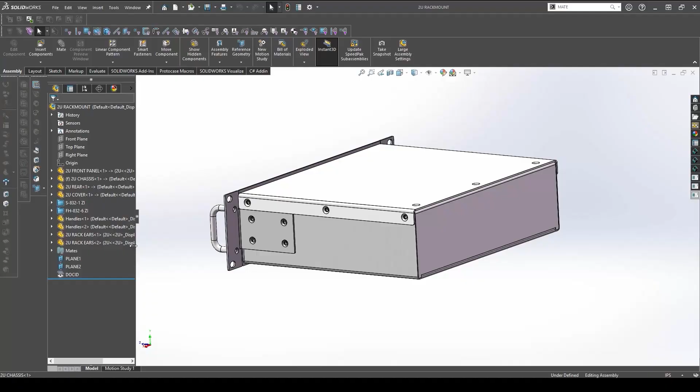First, let's talk about the importance of rack mount designs and more specifically 19-inch rack mount enclosures. Before jumping into your next design, it really does help to understand why the 19-inch rack mount is a go-to choice across lots of different industries. Governed by the EIA 310 standard, this enclosure format is widely used in IT, telecommunications, audiovisual, and scientific labs.

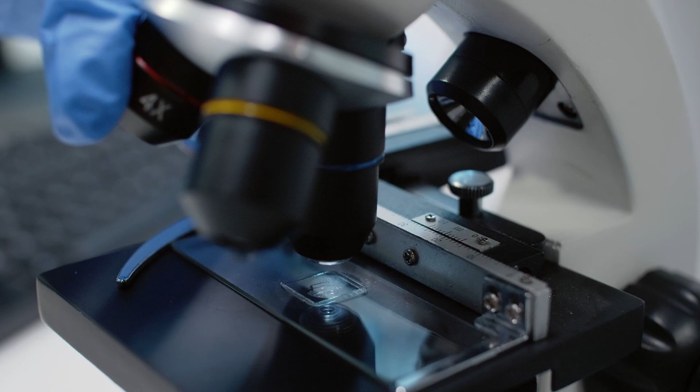It provides a universal system for mounting electrical equipment in a secure, organized way and is most likely installed in storage racks. So here are several facts to know about 19-inch rack mounts if you didn't already know. The standard width: the front panel always has a nominal width of 19 inches, 482.6 millimeters. Unit heights: height is measured in U units. 1U equals 1.75 inches or 44.45 millimeters.

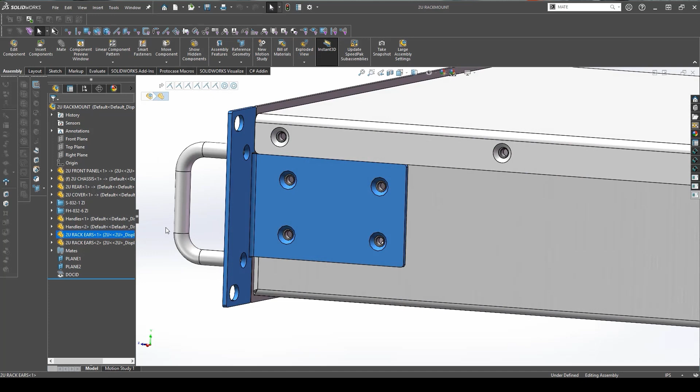Interchangeable mounting: standardized mounting holes enable compatibility across different equipment and racks. These features simplify integration and assembly and make 19-inch rack mounts the ideal choice for housing electronics in professional environments. Designing a functional 19-inch rack mount involves several steps. By defining your requirements early on and keeping key manufacturability principles in mind, you can design an enclosure that looks great, functions well, and is going to be reliable for protecting sensitive components and the electronics inside. So let's look at these steps in detail.

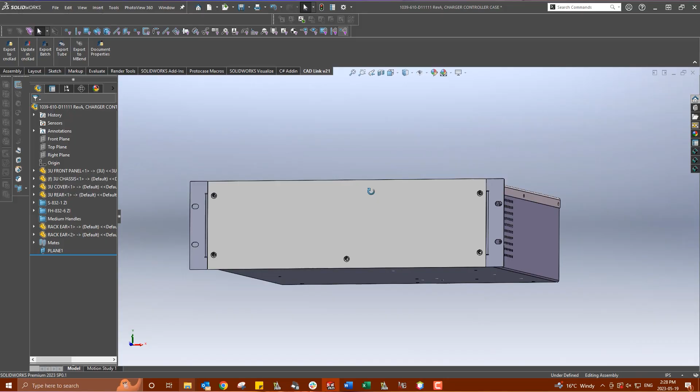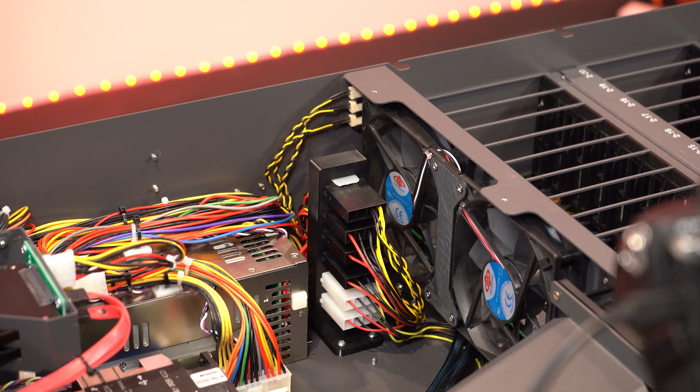Number 1, define your core requirements. Now, before putting pen or pencil to paper, start by asking yourself about the key requirements of your design. What height in U units do I need? Smaller electrical components may fit in 1U or 2U spaces, while systems with more features or faster throughput may need 3U heights or larger. How deep should it be? Depth depends on your largest internal component and the space needed for airflow and cable management.

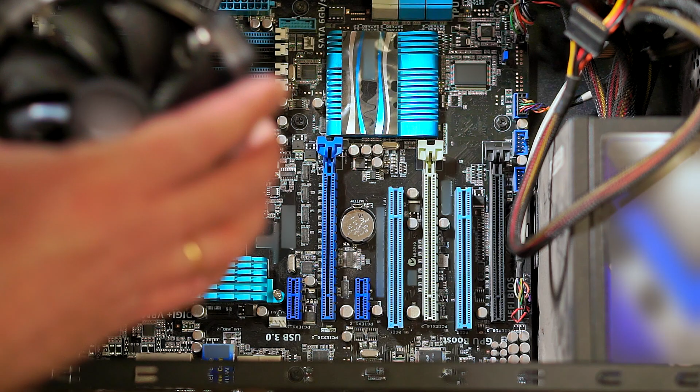Next, what's the internal layout? Roughly map out where components such as PCBs, fans, or brackets will go. This phase will define your internal geometry, mounting points, and cutouts. So for systems generating heat, ventilation or fan cutouts will be essential. Enclosures often include airflow patterns, bringing cool air in from the front or sides and exhausting it out from the back or the top.

What material is best? Lightweight aluminum, like 5052, is a popular choice due to its balance of strength, corrosion resistance, and weight. Steel is much better suited for heavy-duty enclosures or rack mounts that will exist in harsher environments.

Number 2, plan the front panel. The front panel acts as the face of your enclosure. It's where users are going to interact with the device, so you're going to want to think carefully about functionality and aesthetics, especially for the enclosure's intended use case. Controls and indicators: where will buttons, LEDs, or displays go? Are they even critical to the project?

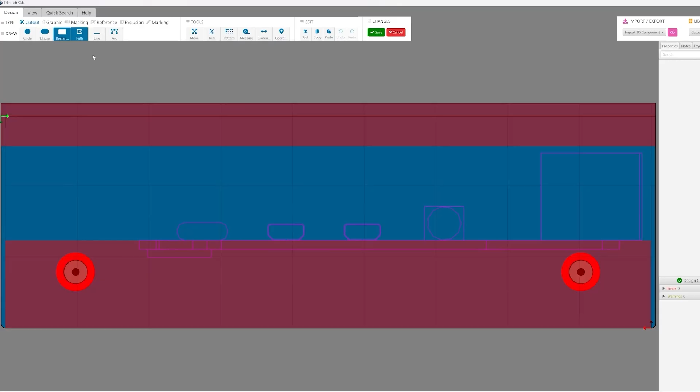Connectors: if USB ports or audio jacks need front access, plan their placement accordingly. Branding: space for digital printing, silkscreened, or laser-cut engraved logos can really elevate your design's professional appearance. Handles.

For larger enclosures, consider adding handles to make rack installation or removal easier. Number 3, design the rear panel. The rear panel is typically going to be the powerhouse for connectivity and cooling components.

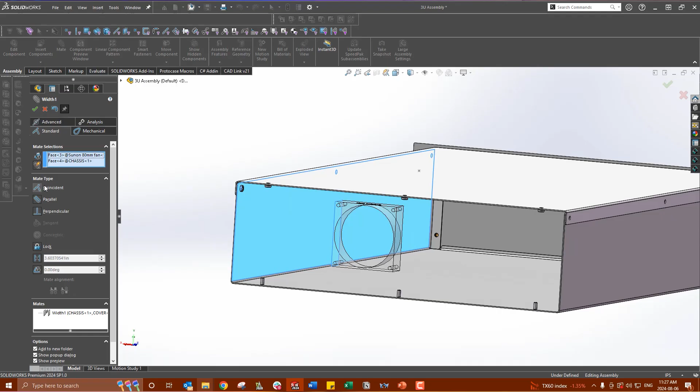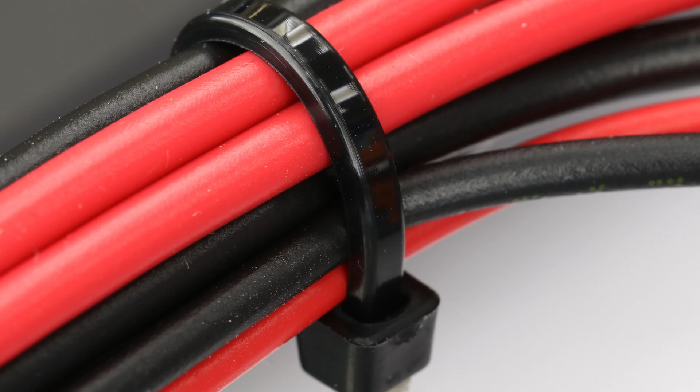Primary I/O. Include connections for power inputs, Ethernet ports, or other interfaces. Fan mounts. Exhausting heat out the back is common, so place fan cutouts accordingly. Cable management. Features like tie-down points can really reduce the clutter.

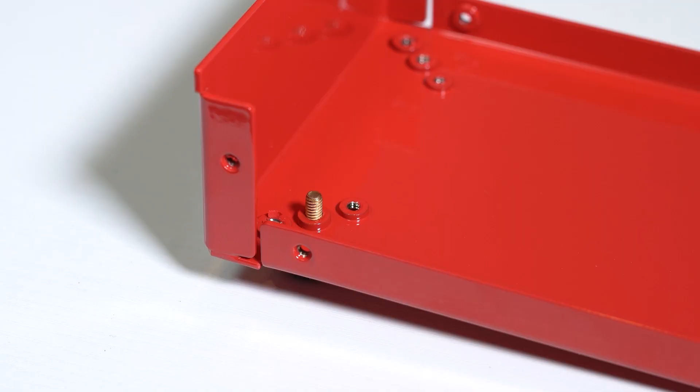Now, number 4, internal layout and mounting features. So inside the enclosure, you'll need to plan for securely fitting your components. You're going to want to add standoffs or self-clinching fasteners for mounting PCBs and other assemblies. You might also need brackets or partitions for electrical isolation or mechanical support.

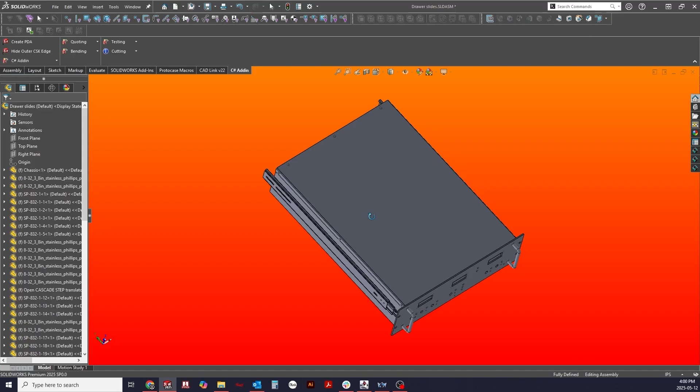Outside the enclosure, if the final destination for your rack mount enclosure is installed in a storage rack, you may want to incorporate drawer slides if you'll need repeated access to your case. All slides will mount to the left and right side of your rack mount chassis by way of 8-32 self-clinching

fasteners, and once the slides are fastened to your chassis, you can simply mount the enclosure inside of a storage rack to allow you to slide your rack mount in and out without actually physically having to remove it. Now, the good thing though, if your case will be put in a rack to stay, then drawer slides are not going to be necessary.

Now, number 5 and the last one, prioritize manufacturability. Finally, a great design is one that's easy to manufacture, especially when you understand our capabilities and tolerances. Besides checking out our digital guide for designing enclosures for printed circuit boards, which is linked in the description below, you're going to want to keep these other tips in mind.

Allow for minimum bend radii, usually equal to the material's thickness, in your sheet metal design. We have lots of charts online to help you with this. Use reasonable tolerances, reserving precision for critical features only. Ensure accessibility for assembly, leaving enough space to install or service the components later.

So now that you've planned the essentials, it's time to bring your design to life. There's a few different ways that you can work with us in order to get your 19-inch rack mount manufactured. Now, for the last part of this video, we are going to touch on just 2 of those ways, and for part 2 of this video, we will show you how to fast-track your design by using our in-house design software called Protocase Designer.

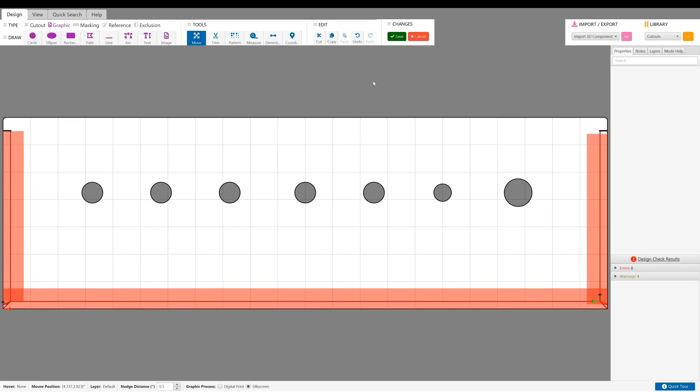So one simple way that you can work with us, especially if you are proficient in CAD, is to just send your CAD design to our team to further assess for manufacturability. If you stick to the above tips, you will dramatically reduce the back and forth communication and get your design manufactured at the highest velocity possible.

Now, if you are in a hurry or don't want to start from scratch designing a 19-inch rack mount, you can use our free, easy-to-use template generator where you select your template style, choose your materials and sizing, and it will generate a blank template for you that you can then import into the CAD program of your choice to further customize. And that brings us to the end of part 1 of this video.

At the end of the day, powered by high-velocity mass customization, we will do our absolute best to ensure that your specific rack mount requirements are always met. Now, I hope this quick overview of designing rack mount enclosures was helpful, and stay tuned where we will walk you through designing rack mounts inside Protocase Designer.